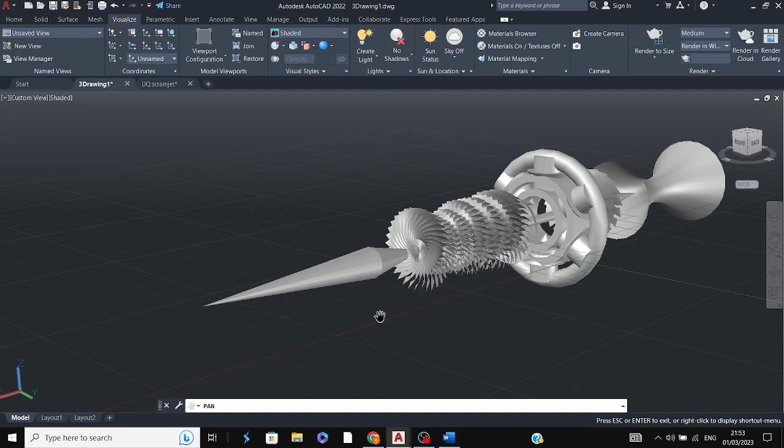So this is, let me highlight it. This is the inlet spike component. So the main purpose of this component right here is that it creates an oblique shockwave. An oblique shockwave is when there's an object relative to the flow, when the flow is above Mach 1, which is at supersonic speeds. The air passes through the point here and changes the properties of the gas, especially the temperature and the pressure of the gas across

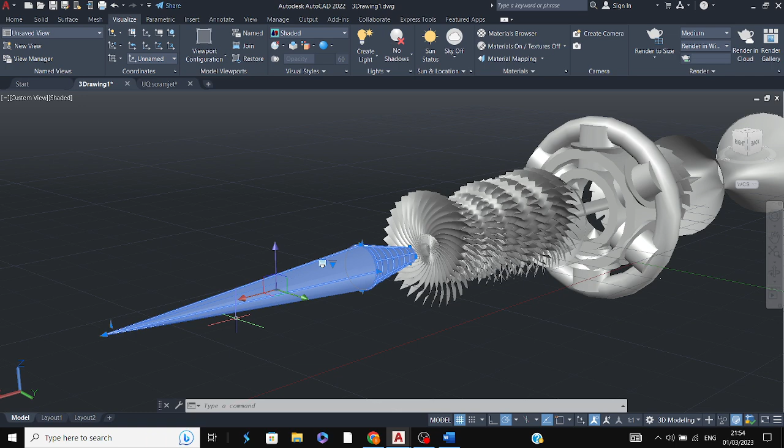the spike. This is to ensure that the air can be much easier to combust with hydrogen because the temperature and pressure have increased. Specifically for this inlet spike, it has a deflection angle of 6 degrees, which I measured geometrically with the measurement tool in AutoCAD. The rest of the details are presented in the document. Now, just this,

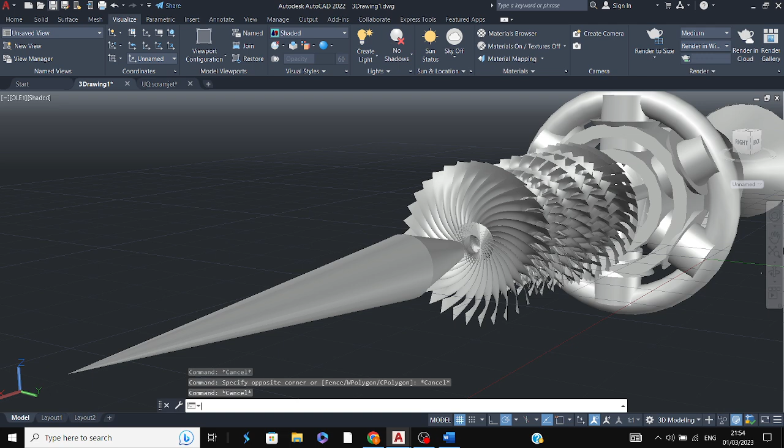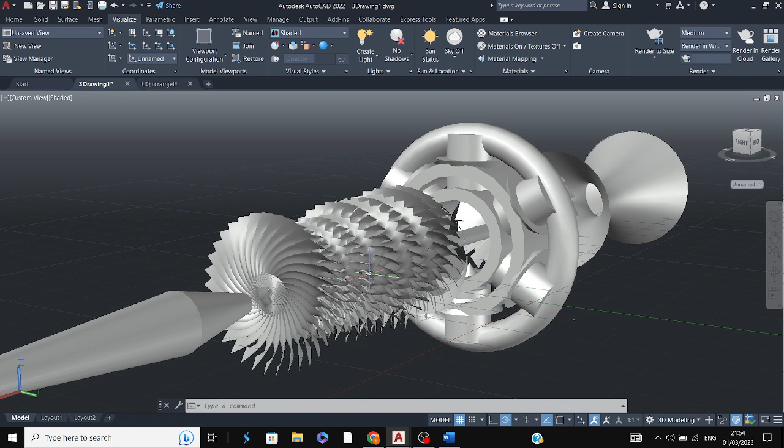let's reset. So now this is the compression stage, which is designed for the engine as a multi-stage axial compressor. I couldn't run simulations online because it wouldn't accept DWG files, so I'll explain what is going on instead. The compression fans rotate, which suck in the air coming from the shockwave of the inlet spike, and this therefore increases the pressure and temperature of the air across the compression stage.

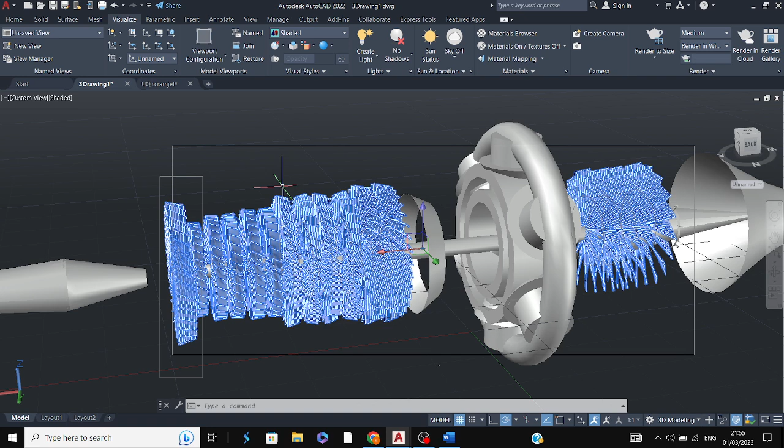As you can see, the stages of compression increase from the first stage to the eighth stage in this compression region of the engine. The values and parameters are again included in the document. Next, this is a new component which I designed to modify the engine, unlike what's shown in the document. This is a supersonic diffuser.

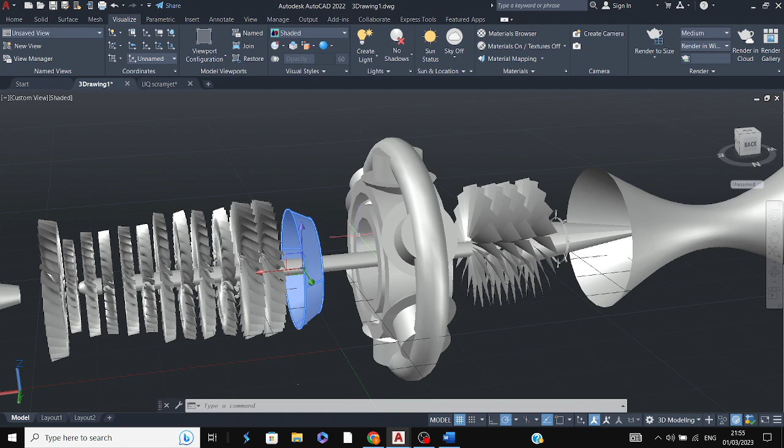Well, subsonic diffuser, because this directs the airflow directly into the combustion chamber, through the hole in the opening valves. This creates another shockwave, so it further increases the pressure and temperature of the air to combust with hydrogen. And now, if I highlight this and isolate it and move it, hopefully, this doesn't seem to work.

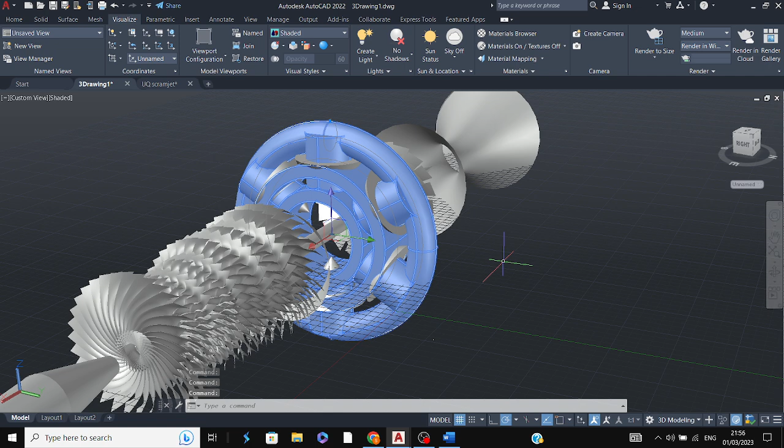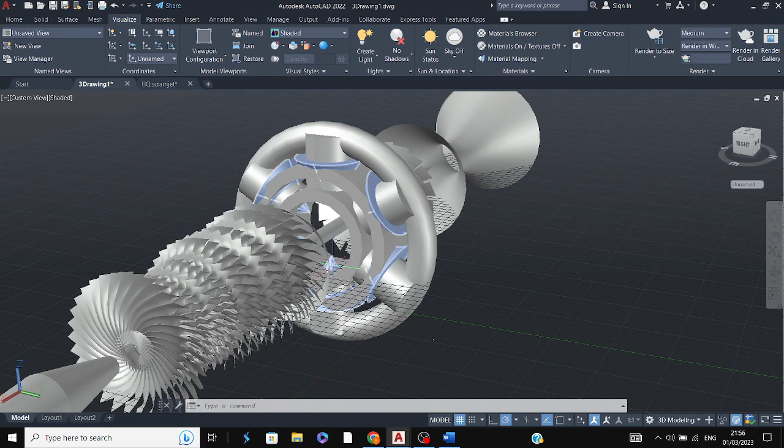So this combustion chamber has 8 opening valves, each containing a ring of hydrogen being transferred at a specific mass flow rate. Again, parameters are in the document. This ensures that the hydrogen is sprayed directly into the airflow through the valve opening, through the combustion chamber. The reason why it's spiky, I'll just try to move this. So these are the spray injectors.

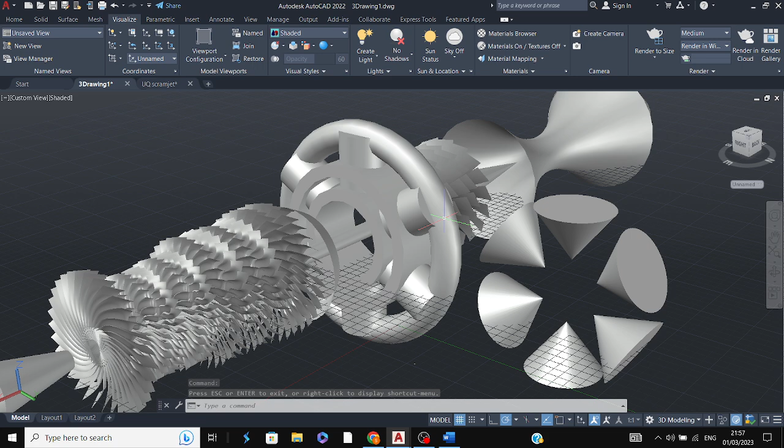These are cone shaped because they increase the pressure of the hydrogen for combustion. Since hydrogen is such a flammable fuel, it needs to be controlled under specific pressures and temperatures to combust with the oncoming flow. If I separate the ring around here, this ring contains hydrogen flowing throughout, and this combustion chamber is connected through a pipe to a metal hydride. A metal hydride is a type of hydrogen storage that can be used for fuel propulsion systems.

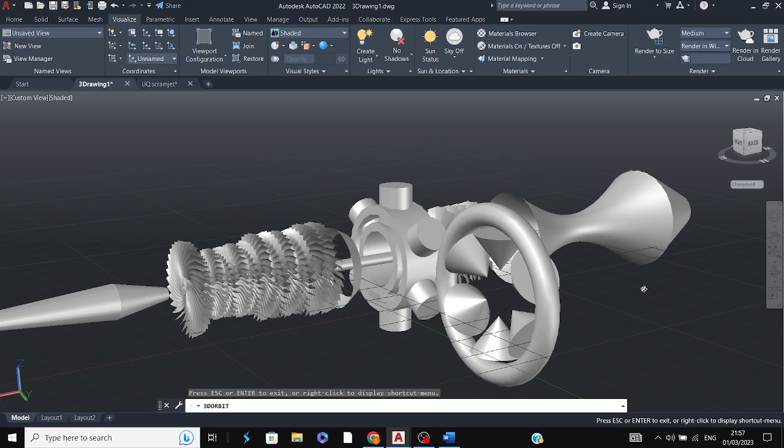So basically, a metal hydride is like a storage unit. When hydrogen is introduced, the metal hydride absorbs the hydrogen, and it needs to be externally heated so the hydrogen is released directly into the ring, the tube, which is connected by a pipe to the storage unit.

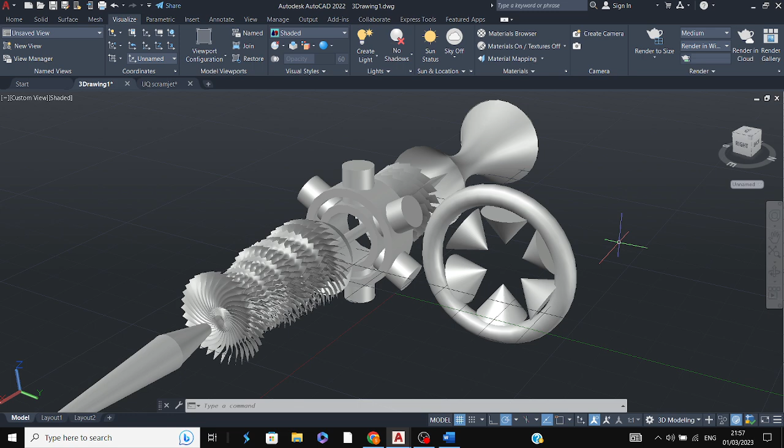The hydrogen storage system is mainly complex and needs to be designed accordingly. However, that is not the main objective of my project. My main project is to harness the power of the hydrogen which is being stored.

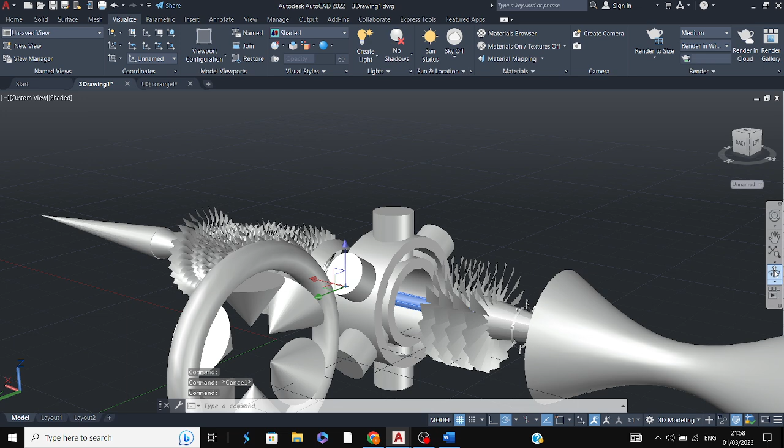So next, if I move on to the turbine stage, if I highlight it again, as you can see, the turbine is attached to a shaft which is connected to the compression fans right here. So when the high flow of air is passing through from the combustion chamber, which is the mixture of hydrogen and air, it causes the turbines to rotate.

I'll just highlight it again. So when it rotates, it extracts the energy from the high flow air and converts it to mechanical energy to rotate the shaft. So if I just isolate the shaft, which in turn is connected to the compression stage. So when the shaft rotates, it turns the compressors as well, the multi-stage compressors.

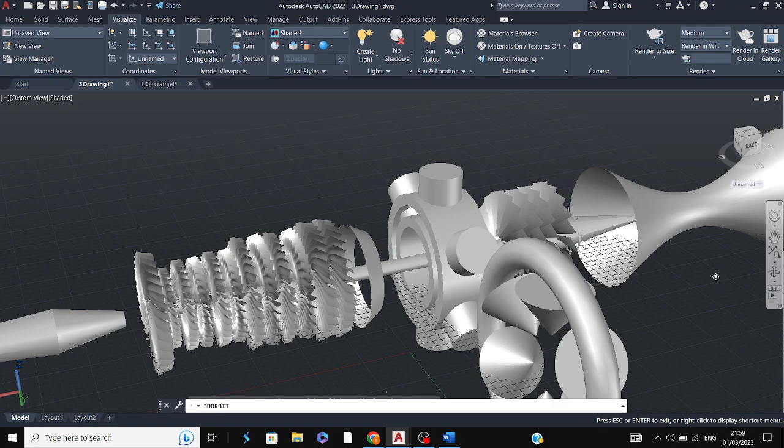This in turn creates a self-sustaining engine, which means that as you start the compression fans and turbines, you don't need more power output to turn the shafts mechanically. The turbines rotate it if there's a high-speed flow flowing through it.

Next is the afterburner, which I try to move here. So if I split it around here. Yes. So as you can see, this has a completely different design from the combustion chamber, because if you look specifically, there are hydrogen spray nozzles around a tubular ring. This ensures efficient combustion, because the flow speed of air through the afterburners is fast enough to be combusted

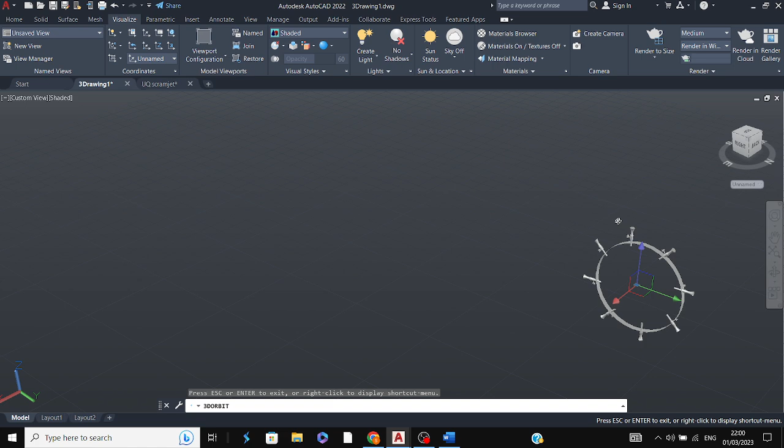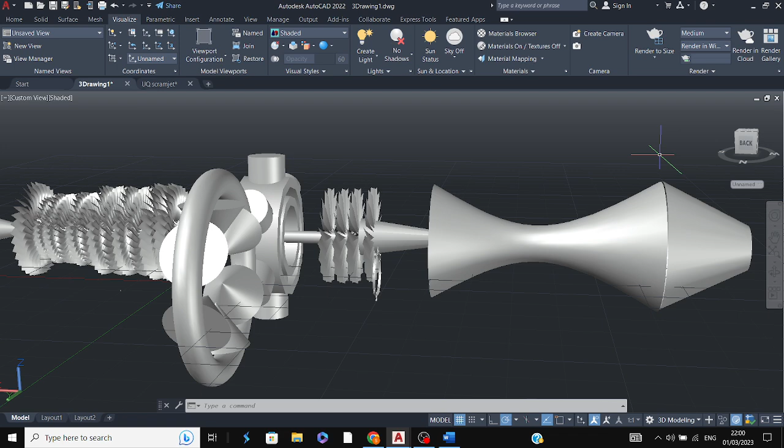Now this part, the last stage of the engine, is the turbo ramjet engine nozzle. What I named this was the double control nozzle, which consisted of a convergent divergent nozzle, also known as a de Laval nozzle, and a variable nozzle as well.

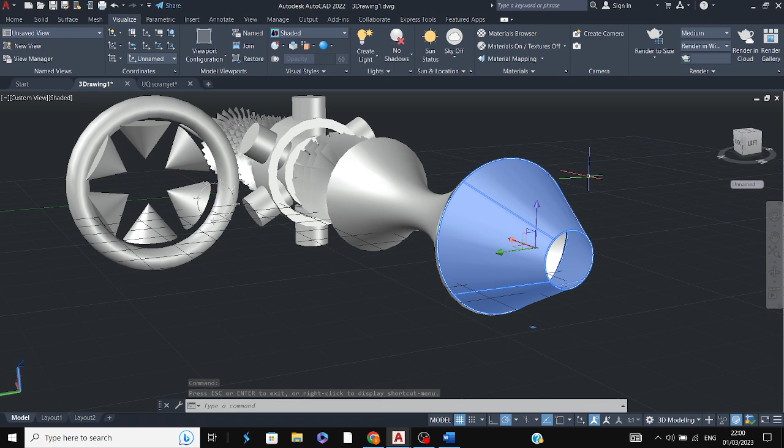Now if you look at typical turbojet engines, the nozzle is basically just a variable nozzle, because as the gases from the afterburner expand through the variable nozzle, the gases expand through the nozzle. So that allows control of the Mach of the air flow.

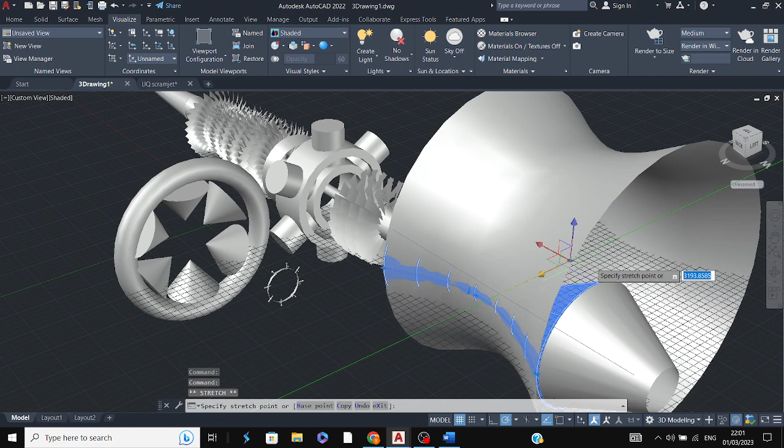But the main reason why I included this convergent divergent nozzle is because it increases the Mach of the flow. Because of its design, the convergence diffuses the air through. So if I just highlight it again. Just isolate it. Yeah. So as the air passes through here, the Mach is generally less than 1, so it's subsonic.

But then as it goes through the diffuser in this part over here, this is when it's at sonic conditions. This increases the Mach to at least a factor of 1.4 because of its gamma ratio. So that was the convergence stage. Now this is the divergent stage.